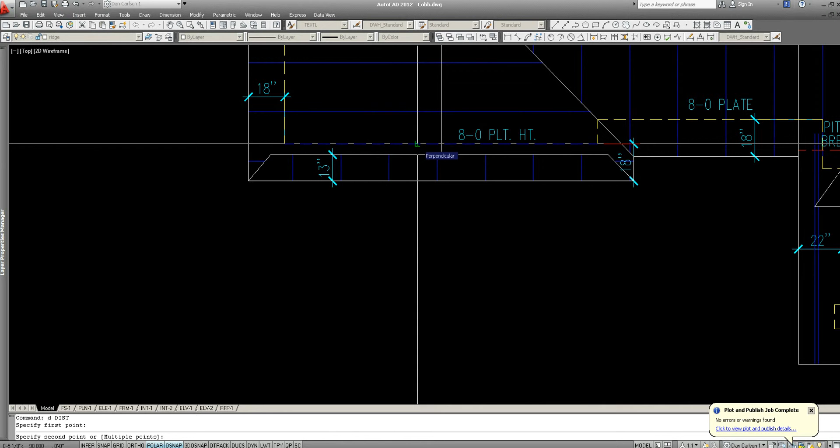They actually have on their example only a 5-inch overhang, and that's too small. That's not nearly big enough. So let's make it a 10-inch for this one.

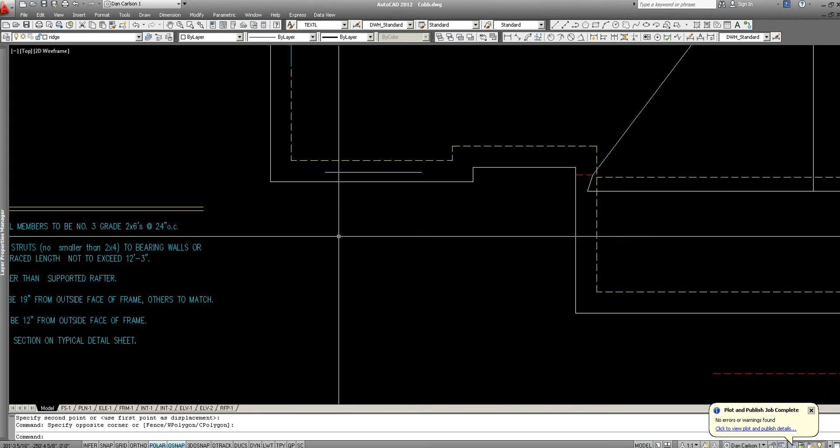So this will be where that gable is. It's coming up and down. We know that this slope on this side and this slope in the front are both 7 and 12s, so that means our line will just be a simple 45-degree angle on both sides. And those will go until they hit that gable, and then they connect.

And then we draw our gable just randomly up, moving to some point. Don't worry about where this ends yet. These show as 8-foot plates, but they're going to be 10-foot plates, and since they're all 7 and 12 pitches, we have normal valleys. They're not bastard hips and valleys, they're standard. So that one will be it, and this will be normal as well.

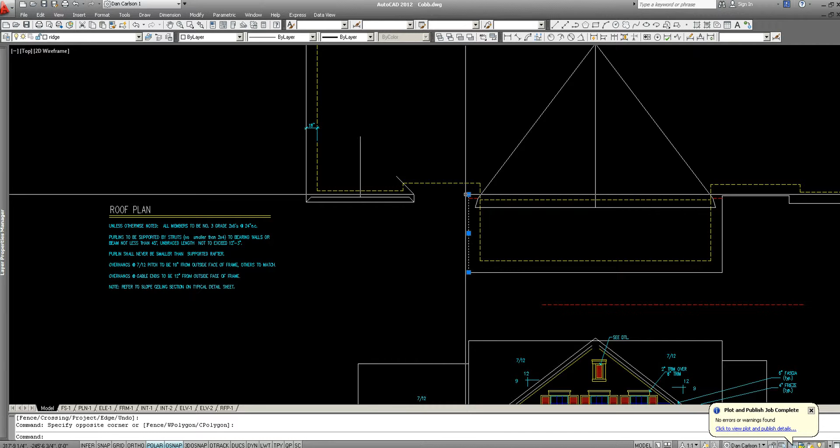And actually, this one's going to be completely different because there is no hip on this side. It's all a gable. So this roof is going to go up to some high spot way up here, this point right here at the center. That's where this is going to go up to. So we'll just ignore that for now. So this comes up until it hits that, and that's the point where

we have this little deal here where we have another gable on the side that ties into this side of the roof. So what they've done is they're building a wall, this gable wall. I'll show you where that is. It's this side over here, right here. This is it here, this gable.

Let's copy that down so you can reference it. I'm going to turn it sideways so that it kind of emulates what's going on here. So we have to build this gable here over on the side. So there's a wall here that you can't see. It's this wall with the siding on it right there.

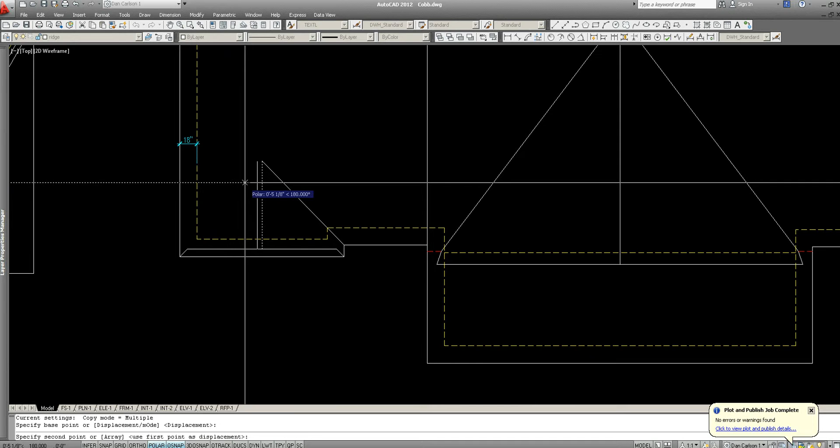We're just going to color that red for now, kind of a dotted line. That represents the wall. And it looks like they have a 12-inch overhang, which is fine. So what's going to happen here is we can actually just take this and offset it 12 inches, because that's going to be our gable end. And we can take a wall that we're going to move over 12 inches and just sit it up here.

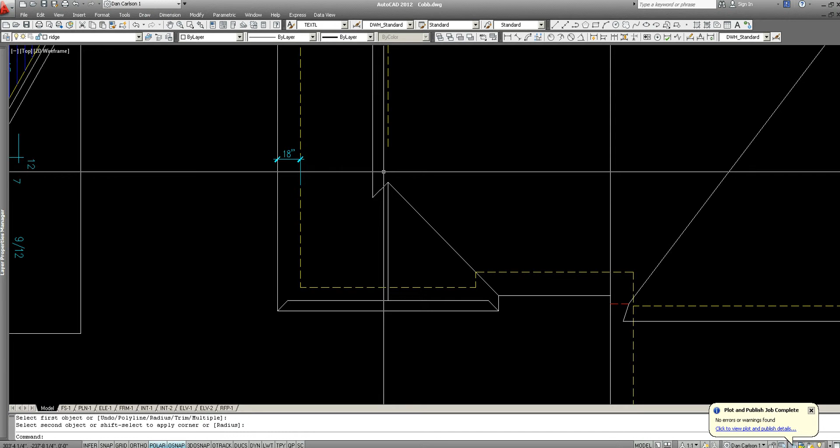This is a wall that's kind of up in the attic. It's not really part of the house. It's just sitting up there. So how does this gable end, which is this right here, intersect with all this? Well, the way it does is you basically take this roof and mirror it until you create this little zigzag.

And you can see that zigzag is right here also in the elevation view. The gable comes down, then we have a valley that goes up and then back down. So the gable comes down, and then we have a valley that goes up and then back down. You can see it over here as well.

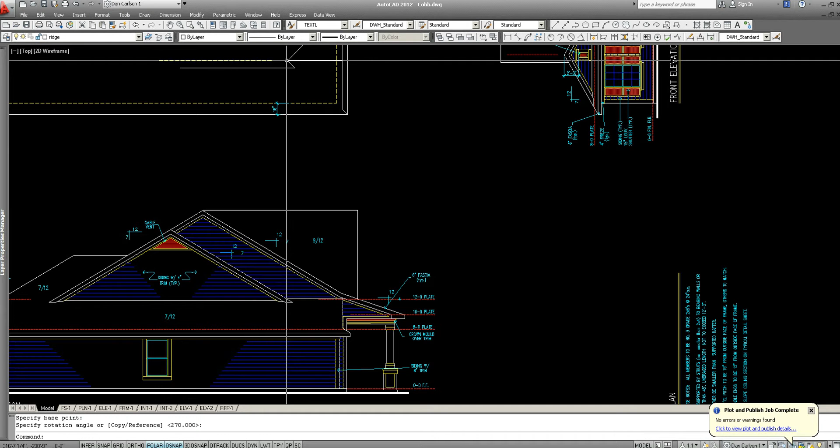We actually want to, just for kicks, right here you can see, here's the gable end. The valley goes up, and then we have our ridge on top.

I'm just going to undo all that and get back to here. Now we want to just leave this about like that. Alright, and it's this huge gable.

We need to figure out where this end down here sits, because this gable ends up falling down onto this. And I have a feeling that the back end of this gable wall is this one right here. Best way to find that out, of course, we can look over here, and it looks like that's what was planned. You can see this is one large gable. This is the top of the gable, the ridge, and that's the back and the front of it.

So if that's the case, and we have an 18-inch overhang up here, and we have an 18-inch, actually, apologize, it's this here. This is our point here between these two lines. That's where our gable end is going to be. Whoops.

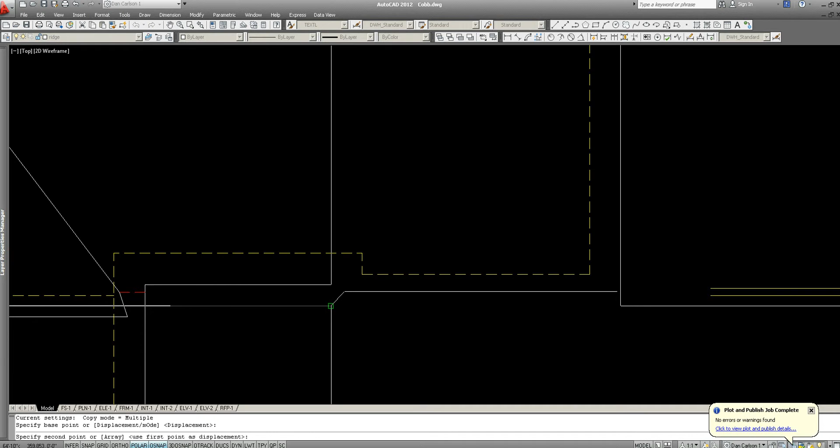This over here, we don't have it yet, but you see this little structure right here? We're going to put another one over on this side because they wanted to add some stuff over there. So what we're going to do is just copy this detail over to here, and mirror this guy over here.

Trim. Draw a line up. There's another hip right here, and that comes up until it hits this. And then again, we're going to do the same thing we did on the other side. We're going to offset this.

No, we're not. This is a different deal altogether. How do we do this one? Because at this side... see, I'm figuring this out as we go right now.

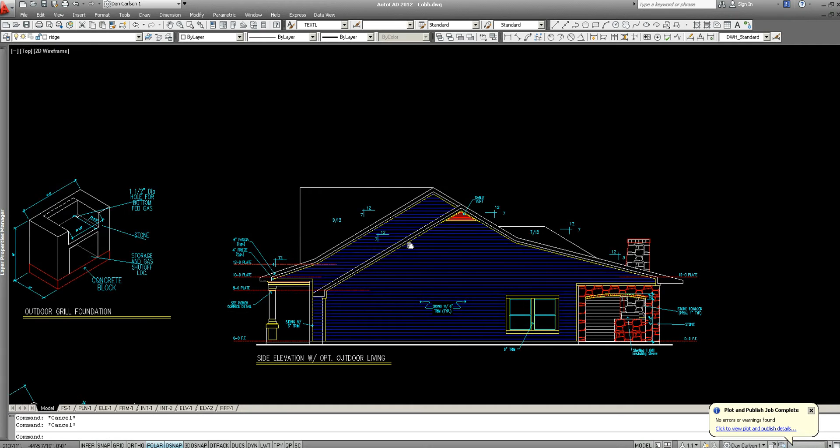If we wanted the gable to be all the way at the end, like it is here, pull this one over. Here it is. This is it here. You can see how this gable is the entire end of the house. If that's the case, then what we want to do is...

...exactly what we've got here. One second, I'm going to pause this while I figure this out.

Alright, so I figured it out, and here's the reason why I was confused. This is shown as an 18-inch overhang, but since it's a gable, it's actually going to be a 12, so we're going to move that over 6 inches.

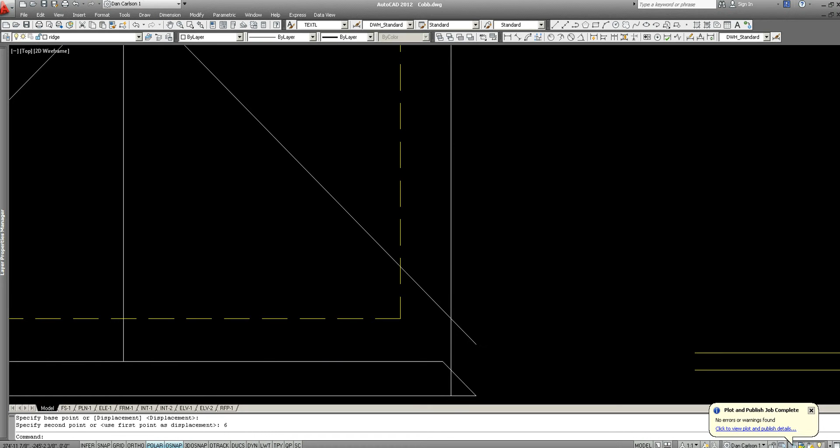When we do that, this is where we see the problem now. So we're going to move this guy back over 6 inches, and we're going to end up with a little bit of a wraparound deal here, where this becomes our little... see we have like this little V, like a zigzag again, similar to this zigzag. The only difference is this one's only going to terminate probably back somewhere around here.

So you can kind of see how if this is a roof that's sloping off to the side, it just comes over here and dies off. So you could put some gutters like right here. And when we draw the side elevation, you'll see how that looks. And this could be maybe about 4 feet.

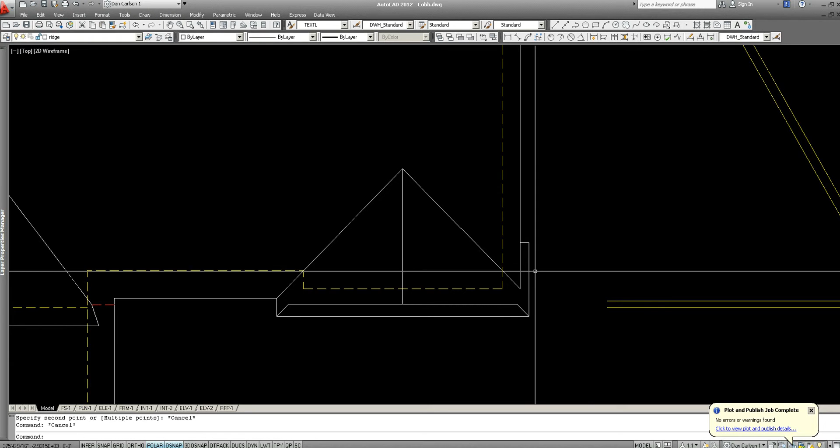So now we have our normal gable. It's again a 12-inch overhang. And that just is going to randomly come over here. Now we've got also this roof here, another separate gable, and it comes up independently.

So the question is, how do we know? We knew where this ridge was because it was in the midpoint. Again, we can draw a circle and see how it touches there and there. We know that we're right in the middle. And that only works if this is a 10-foot plate and this is a 10-foot plate, which they are.

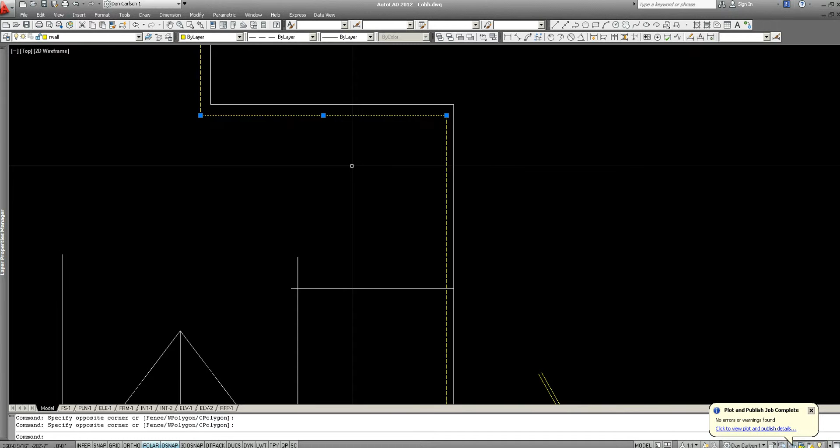So how do we find the ridge for these two roofs? So what we're going to do is draw a 10-foot plate on the back right here. It lines up with this detail.

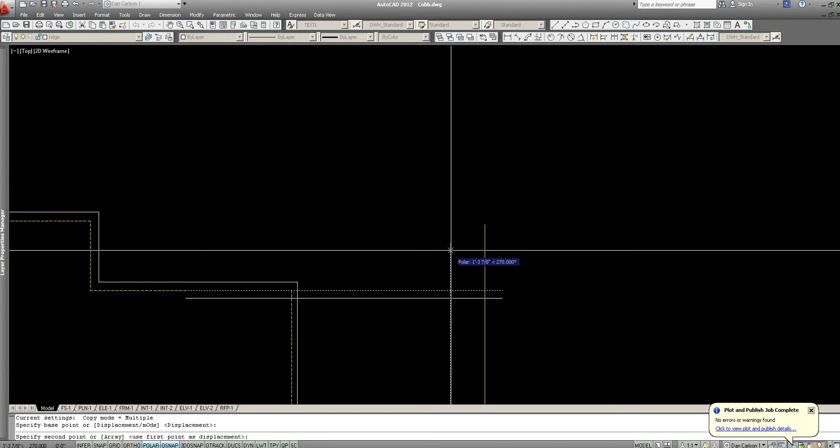Offset this 4 inches, and then we're going to go up 10 foot 1. That's 10 foot 1 inch. And we're going to draw a 7 and 12 pitch. 12, 7, close, offset 6 inches.

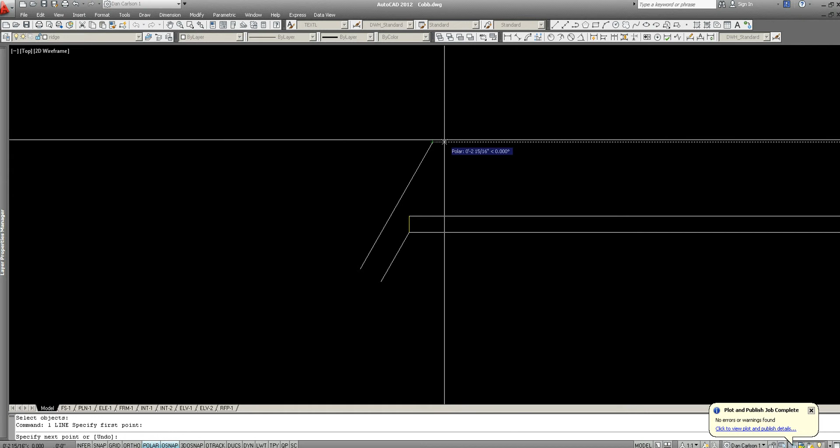And then we're going to do our 18-inch overhang. And yeah, I'm doing it sideways, but you can do it sideways or upside down or however. There's our simple boxed soffit right there.

And we're going to connect this to this one here. This was our 7 and 12 pitch that was sitting on a 12-foot plate, if I remember right. Let's see, this should be 12 feet. That is 12 feet.

Right there, 12 foot 1. This one is 10 foot 1. You don't need to dimension that, I'm just doing that to show you.

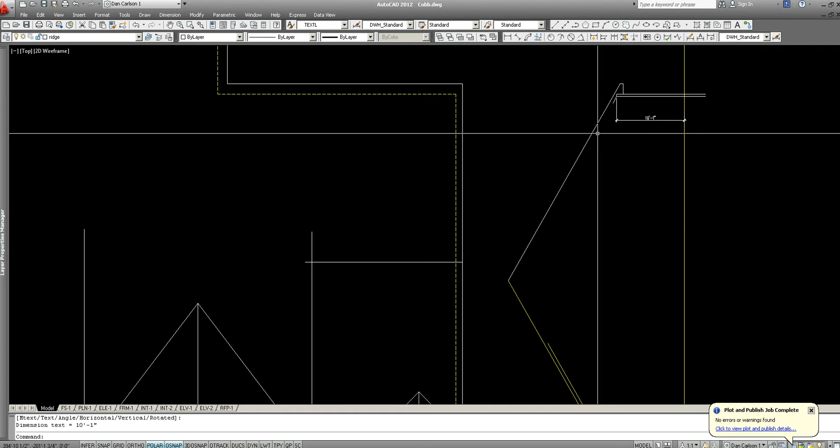And so here we have where our ridge will be. So we're going to draw this across, and this is only for this center section. So we'll come over here, and it will look like this.

Okay, now how do we figure out this? Well, the truth of the matter is, this whole gable here is going to be the exact same as this side because we're pretending that this goes all the way across like that. Basically, that's our roof. So this line continues all the way across, which means that this ridge is at the exact same spot, like this, and it kills right there.

You can see that we're pretty close to what the original plan was. We're not right on, but close enough that I know it's going to work.

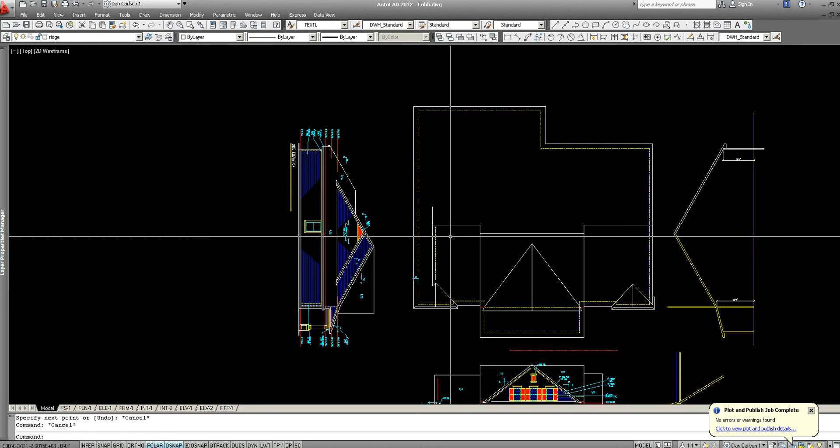Then we come to the back. This is not drawn yet, so we can't copy it. We're just going to draw a big 7 and 12 pitch roof, which means we just draw 45-degree angled lines. This becomes a ridge here,

and mirror that, and this is going to become another zigzag. And here's what we have here, another zigzag. It comes and wraps around.

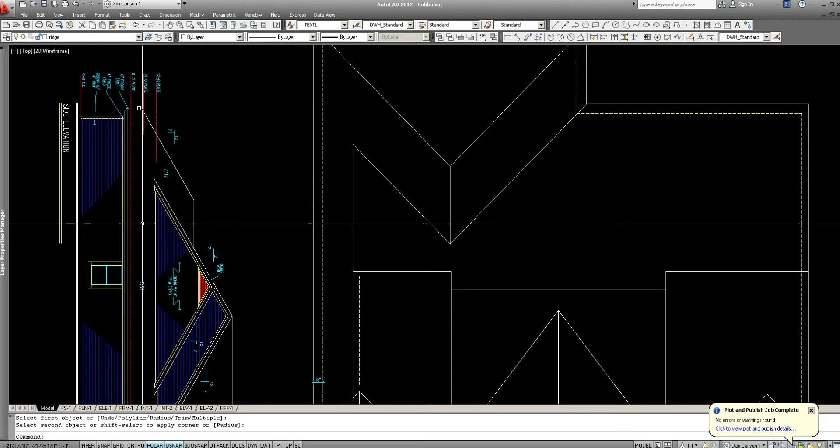This sloping 7 and 12 roof wraps around the gable. And here you can see here, this is the 7 and 12 roof, and it wraps around the gable. So that is, right there, what we have is the basic roof.

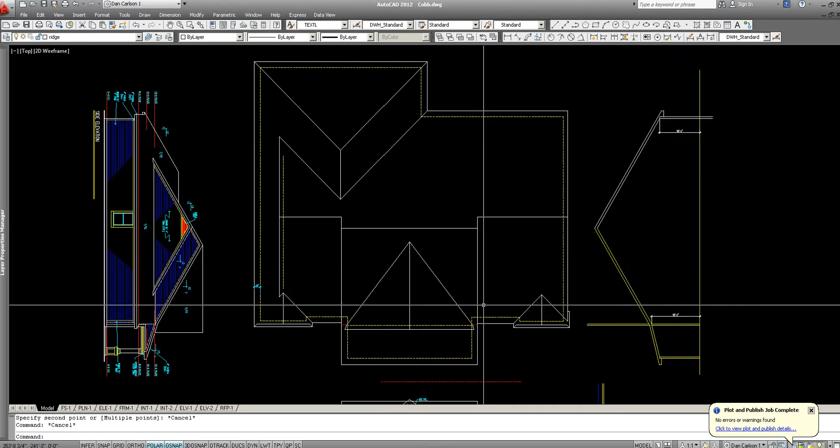We're going to go ahead and extend this over. We're going to add, and I sure do not like these 18-inch overhangs. I'm going to change that to 12-inch.

So we're going to stretch these over 6 inches and 6 inches, because when we build our wall up in the attic like this, that's a wall that the framers will put up there, and those walls need to have a 12-inch overhang. There's 12 and there's 12.

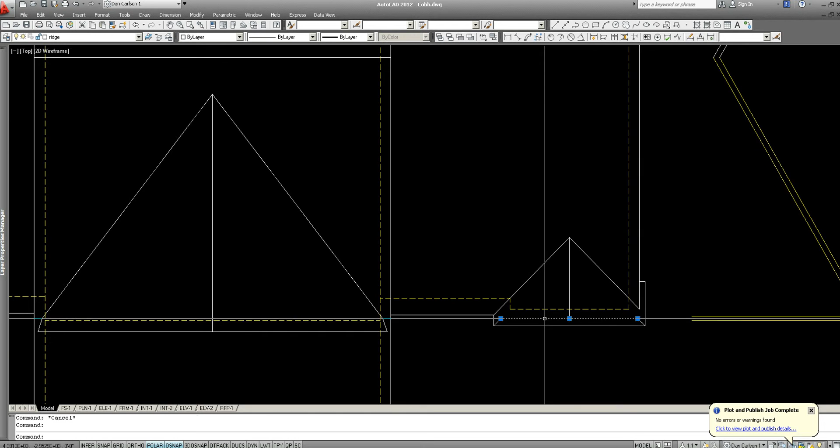And so every gable that we have, this is a gable, it has a wall. This is a gable, it has a wall. This is a gable, it has a wall. This is a gable, it has a wall. This is a gable, and it has a wall. Does that make sense? Alright.

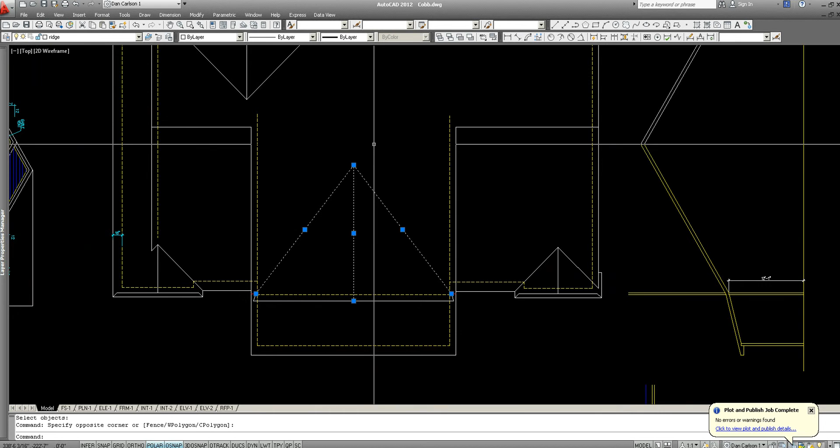So at this point, we actually have the basic roof, and that's about 90% of the battle with these things. We also want to make sure that this peak did not interfere with this ridge.

Right now it looks like it would have. You see that? It looks like this ridge went higher than the main roof, but because this house got bigger, in fact, let me just check one thing, 7 and 12, make sure the back was at 7 and 12 too. Yep, 7 and 12. So it looks like they just simply didn't draw their ridge high enough.

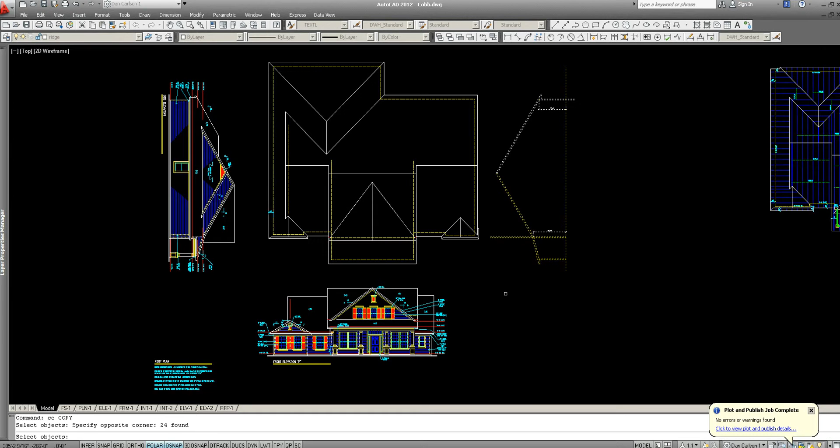So here's how we can test that. We take this same model that we created, turn it sideways, line this up, move previous, get it out of the way, the stuff.

And if I take this point here and draw it across, you can see that for some reason the original designer had that way too low. So we just fillet that, and there.

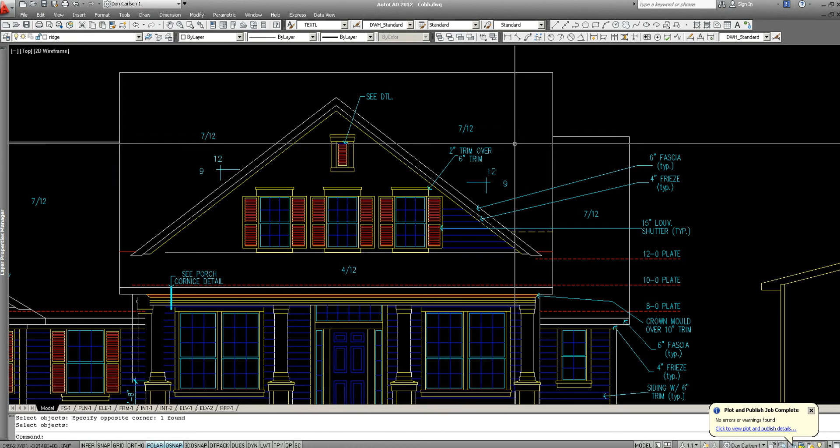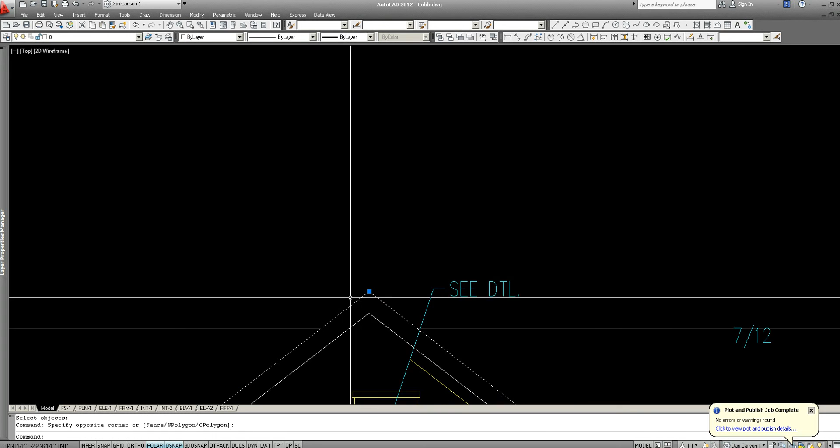Now, at least we know that there won't be anything weird. If this was here, then we'd have to do some funky deal like this, where we'd have to create a pop-up that looks like this. And that's what it would have looked like if it had done this. And we try to avoid that if possible, where this roof sticks up higher than the ridges. But that's not the case, so not a problem.

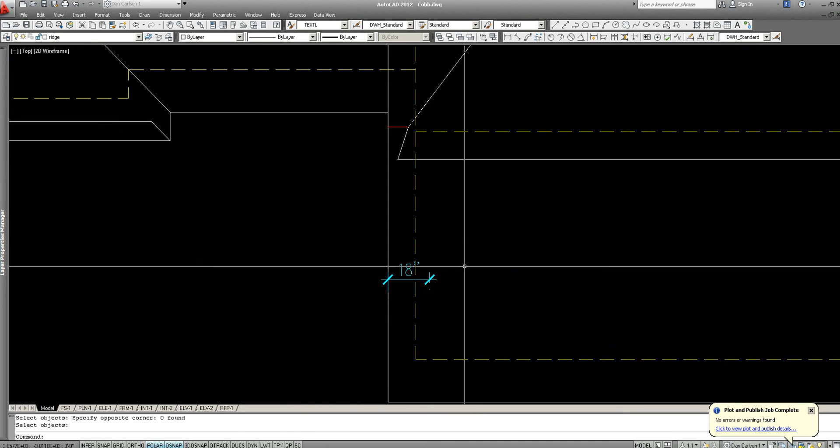Alright, so that's it for the basic part of the roof, the most important part. And then we just go ahead and grab our overhang dimensions and pop a few more on. We can convert this over to 12 and grab that and put it at a few of these other spots, just so the framers know what we're doing for overhangs.

And on the next video, I'm going to show how we fill in all the stuff on the inside.